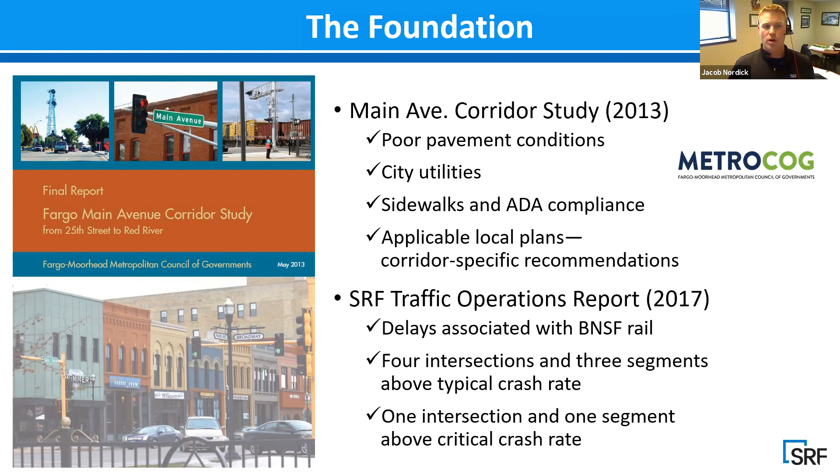The study actually covered from 2nd Street, near the Red River Bridge, all the way to 25th Street. The project we just completed was only a segment of what that corridor study covered, and there's a movement toward completing that next segment. So the segment we're talking about today is from 2nd Street to University Drive.

This was a full reconstruction of the entire corridor, including underground utilities. It was basically building face to building face reconstruction.

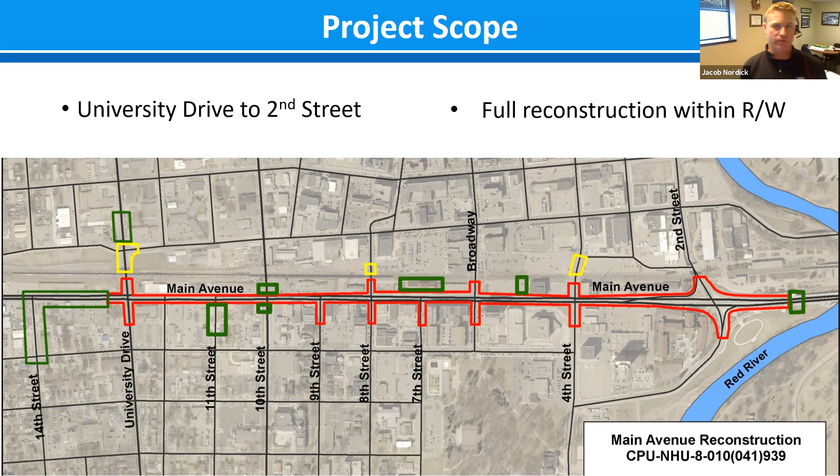Some of the items identified in the corridor study were the poor pavement conditions. As you can see in the photos, the city's had to overlay and repair a lot of this roadway throughout the years with freeze-thaw cycles and a lot of potholing.

As I mentioned, the city utilities, water and sanitary, were well beyond their life expectancy and were in need of repair. The sidewalks, as you can see in the photo, really do not meet ADA compliance from a surface standpoint or a width standpoint.

You can't see it very well here in the photo, but right here is a light pole right in the middle of the sidewalk, and that was pretty consistent along the entire corridor — light poles or signal poles right in the walking path, violating ADA standards today.

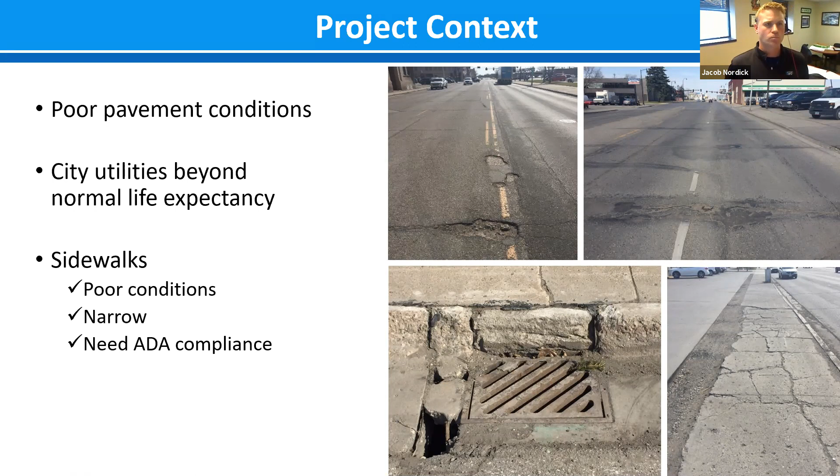So what to do with the current on-street parking, ADA compliance, and the improvements to maintain acceptable traffic operations. It's currently a 5-lane section. There are some turn lane improvements that needed to be looked at further, such as at Broadway and 8th Street.

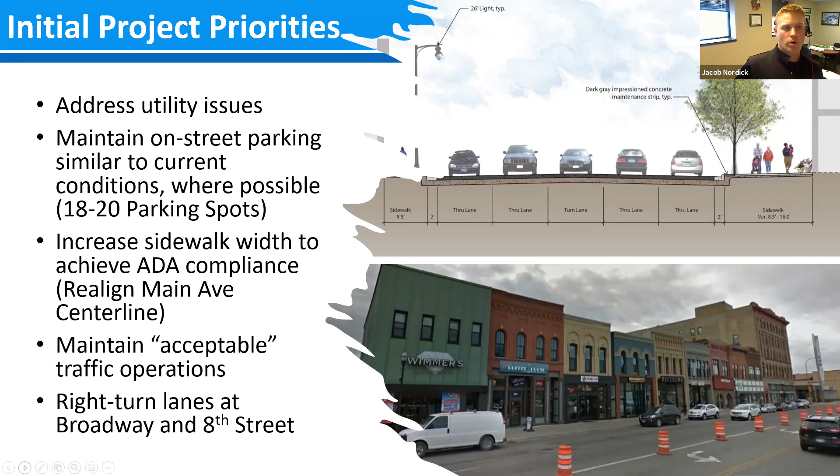One other wrinkle you throw into the traffic operations is the railroad along the corridor, on the north side of the corridor, as you can see here.

We started the project in 2016 with a schedule of completing the environmental and prelim design by the end of 2016, then preparing final design and bid packet toward the end of 2017, for construction to be completed in one season in 2018. Anticipated costs were around $10 million for the reconstruction from 2nd Street all the way to University.

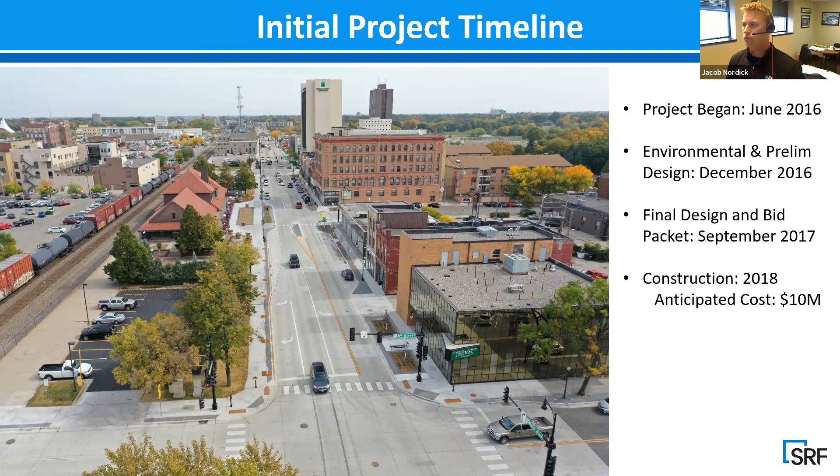As we got into the environmental process, a lot of things changed throughout the development, not only of the traffic, but just the environmental issues.

At the same time, the city had started to develop a Downtown in Focus plan, really focusing on what does downtown need to look like, and what are the city's needs and ideas for the future — grow as a neighborhood, prosper as a business, have Main Avenue or downtown Fargo be a destination center, and how you can have complete streets as part of your redevelopment of downtown. Those are some things the city was focusing on.

At the state level, the governor's Main Street Initiative was kicked off in 2017, with 3 goals for main streets across North Dakota, in small towns and large communities: building healthy and vibrant communities, a 21st century workforce providing working opportunities downtown, and smart, efficient infrastructure, focusing more on that complete streets concept.

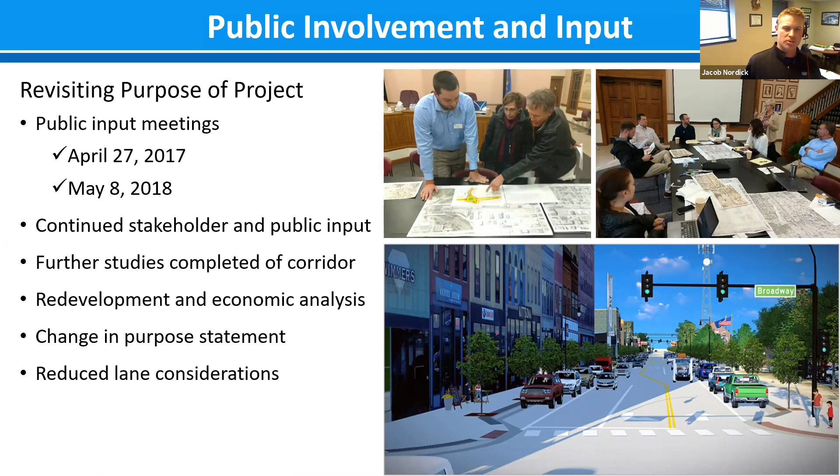There was extensive community outreach. As I mentioned, the redevelopment and economic analysis came about — I'll talk about that in a little bit — and just the change in the purpose of this project. Through that, we looked at reduced lane considerations and how that impacts the corridor, not only from a traffic standpoint, but from a pedestrian environment, growth, parking, and business development.

So we started to really engage the property and business owners along the corridor. Here's a map of all the business and property owners along the corridor, shown in purple. We sat down individually or as groups and talked about it, over 60 representatives throughout that process.

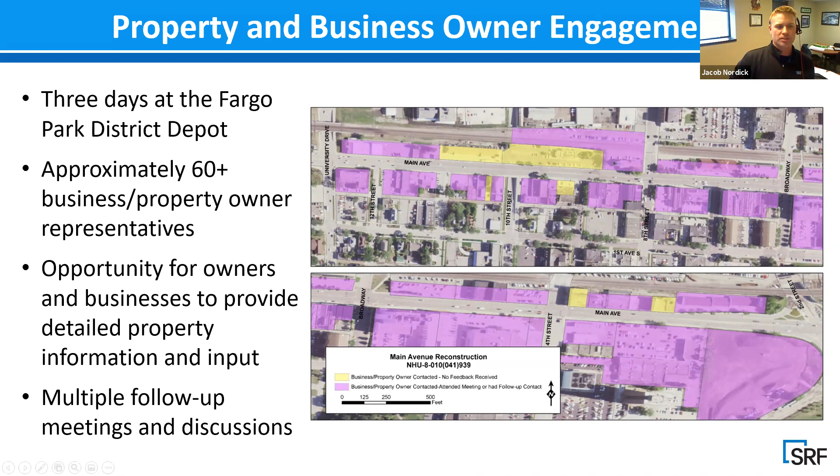And we really gathered information on what's important to each individual business, each individual property owner, and what are their plans for the future as well. So there were multiple follow-up discussions, and we also had further discussions as part of the redevelopment and economic analysis, talking with these landowners. What this analysis did was really focus on what are the opportunities for development if, say, we'd go with a 5-lane section, which is the current cross section of the roadway.

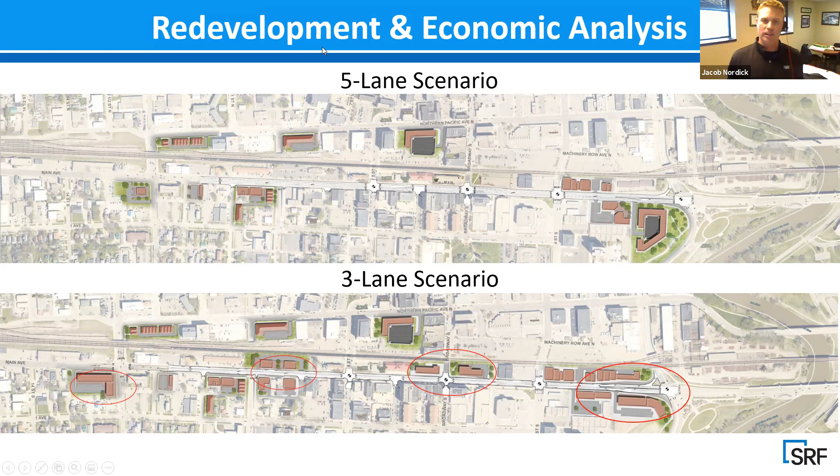What areas are there potential for development? They also looked at, if we do a reduced lane scenario such as 3 lanes, what opportunities are out there. As you can see, I circled the different areas along the main avenue corridor that provide more opportunity than the 5-lane scenario identified as part of this economic analysis.

So the original purpose of the corridor—what was the purpose of this project when we started? It was really to mitigate system deficiencies, address safety issues, improve capacity constraints, and just provide a safe and efficient regional corridor. As this process began, and we began to think outside the box for this corridor, what do we really want to achieve here for the future?

We had made some changes to that purpose. Instead of it just being improving some safety by trying to widen the sidewalks as much as possible, that could be done in a number of different ways, such as adjusting the alignment to balance the width on each side to provide a more consistent sidewalk width for pedestrians.

We looked at how we can make it more active, comfortable, and inviting for pedestrians. That was done through a number of things, through ideas for landscape architecture, that complete streets concept, and curb bump-outs at the intersections to reduce that crossing distance for pedestrians.

And then really incorporating that redevelopment and economic analysis—how is that going to contribute to an environment that encourages business activity, investment, and redevelopment? And then lastly, on the traffic side, we wanted to support regional and local traffic needs.

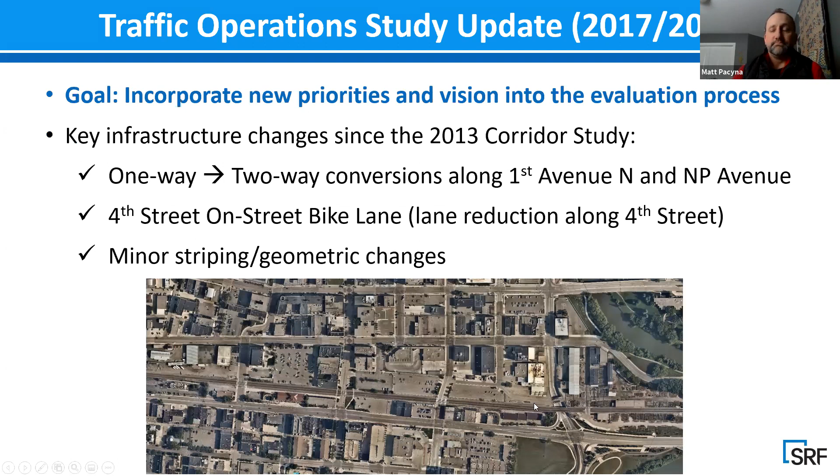economic friendly type of vision. Some compounding factors here to think about. There's the rail line that's just a couple hundred feet just north of the corridor. At the time, there was probably 65 to 80 trains a day running through there.

And if you remember, that was kind of at the height of the oil boom out in Western North Dakota. So there was a lot of train and freight activity running through the corridor, which, given the at-grade crossings at a couple locations, really played into a lot of what the corridor ultimately was built as.

There's a lot of parking maneuvers on the corridor, so we actually took some detailed observations to understand how those users were parking, how long they took, and what the turnover rates were, to really understand that operation, and built all that information into our modeling components.

I think it's something we do more on a daily basis now. Back in 2013, we looked at it more on the ADT level and then at the peak hour level. Nowadays, when you're looking at complete streets, it's more of how does it operate throughout the day. We're willing to maybe live with a little bit more congestion during the peak periods to have a more favorable environment for peds and bikes and other users on the corridor. So that's kind of where things were at and how things changed since that 2013 study was completed.

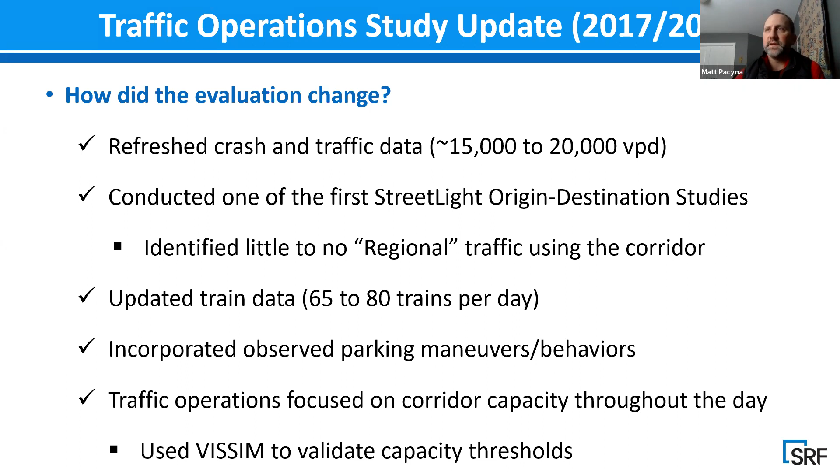So from an alternatives perspective, if you want to go to the next slide, Jake. We basically started with 3 primary alternatives: a 5-lane section, which was more or less what was there today, a 4-lane section, which is essentially a 2+1, so 2 lanes in the eastbound direction, 1 lane in the westbound, with a continuous center 2-way left turn lane, and then a 3-lane option. So those were kind of our 3 primary ones.

As we went through the alternatives analysis, we started to get towards that hybrid, and we'll talk a little bit about why we got there. But in general, that hybrid started out as a 5-lane section coming from the west at University Avenue, transitioned to that 4-lane section from 9th to 11th, maintaining 2 lanes eastbound and only a single lane westbound. Then ultimately with only a 3-lane section towards the east side, from essentially 2nd Street to 9th Street. So that's kind of how the alternatives shook out.

Give you a couple examples on just some graphics that we had developed at the time. I know, granted, these are 4+ years old at this point, so I'm kind of trying to jog my memory as we go through this as well.

This is just some of the tools that we had to use at the time, showing how the corridor volumes change by time of day, given capacity level thresholds for what each of those roadway configurations can handle from a planning level perspective. We started to see how the operations would change at different times of the day, looking at number of hours near capacity or over capacity, and then letting that compare the different alternatives as we looked at each of the different options.

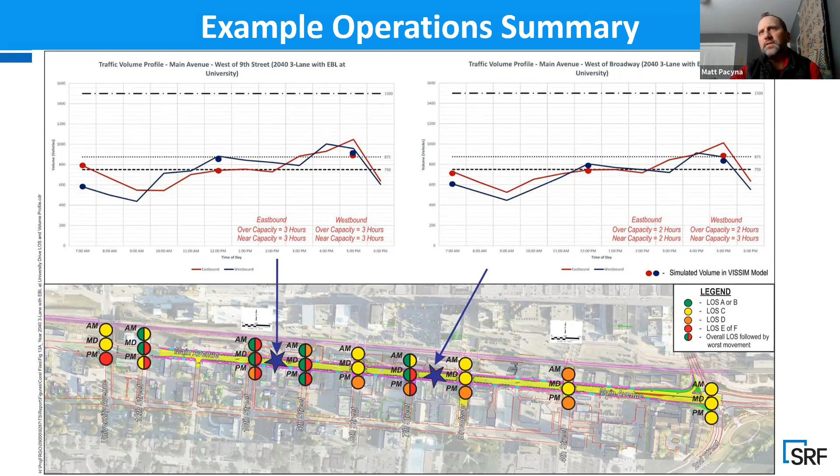We also developed some side-by-side simulations. We don't need to go into too much detail, or if you want to click play, Jake, you can do either or.

But these were essentially used as a tool to help illustrate those operations and how they compare between each of the alternatives.

Now, we looked at things with and without train events. I think Mr. Gordon is on here - we're joking about seeing if we can get him to talk. I don't think he's going to.

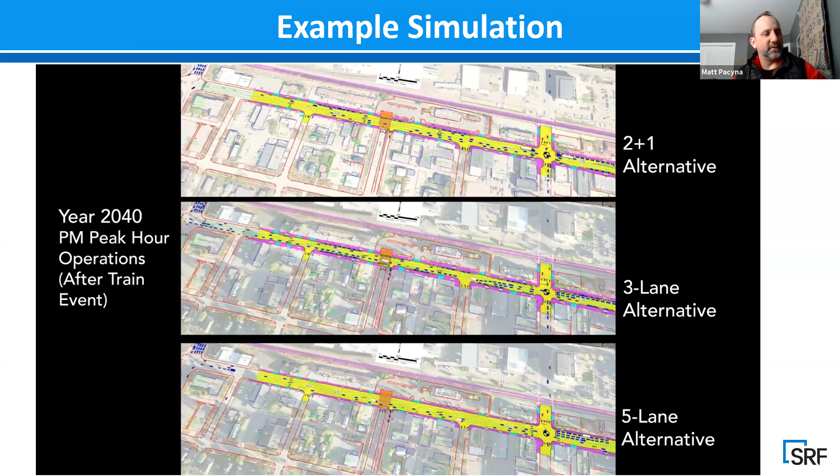But the train operations really were and are still to this day a key component to how Main Avenue operates. And when there is a train event, it can lock things up. So we wanted to be very mindful of making sure we can have enough storage for the vehicles to wait for that.

But then also how we're trying to understand how quickly it'll recover. When you have those peak periods, are you going to start to create diversion? Can things recover in a few minutes, a few cycles, or is it just going to blow up and extend into multiple hours? So understanding that train dynamic was key, and it also spurred on some other improvements that came out of this as well.

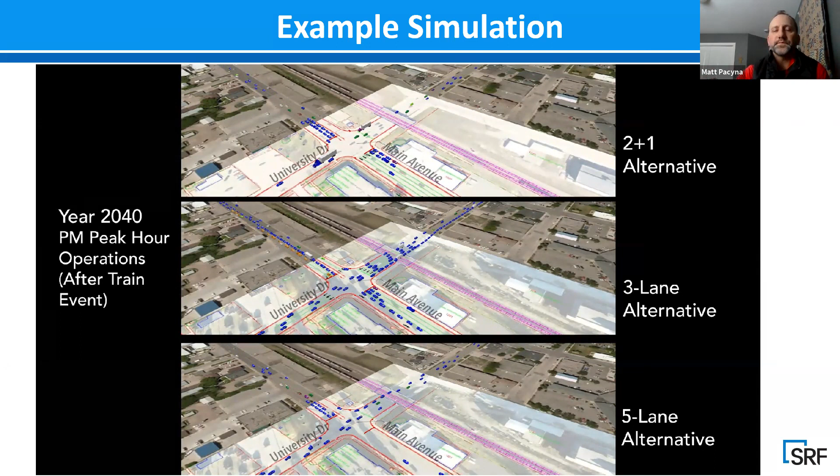So from a conclusion perspective, where do we end up? Really the 5-lane and the 2+1, or the 4-lane alternative, whatever you want to call it, would provide sufficient long-term capacity. The 3-lane option really didn't, and it resulted in some diversion to adjacent corridors. So really that's where the hybrid alternative came out of.

Does it fully meet every single hour of the day? No, it's kind of that balance of all the different needs. We would expect it still would result in some diversion to adjacent corridors. I don't think I've looked at the volume since it's been open and constructed now, but I wouldn't be surprised if there was a little bit of diversion to some of those other corridors.

And then the study also identified some other operational considerations with respect to travel time reliability. I think probably the two main ones that came out of that really was the University Avenue counterflow lane. There's really only one underpass today, outside, for northbound traffic to cross the railroad tracks. There's a couple at-grade crossings, but when you have the volume of train events that they have, finding another more reliable opportunity to get into downtown is important.

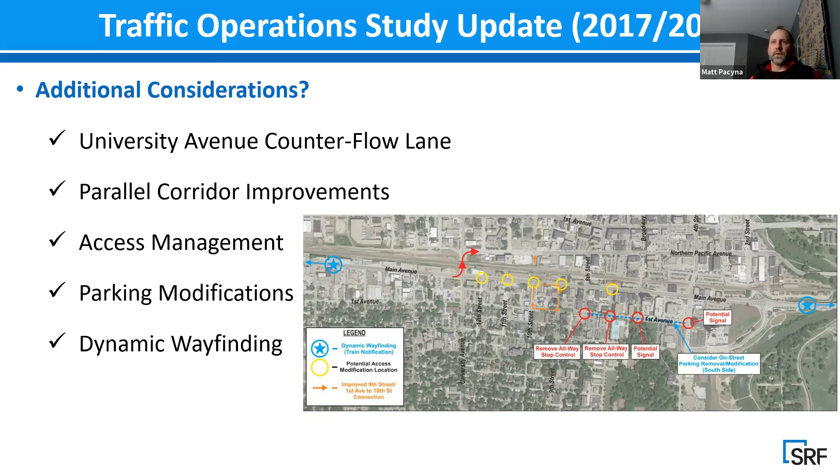Since there's little to no regional traffic from FHWA and the DOT's perspective, do you have any thoughts there?

There was discussion as part of that development during the environmental phase and preliminary phase of rerouting Highway 10 traffic to the interstate. That discussion happened, but then you're getting into multi-jurisdiction between North Dakota DOT and MnDOT as well. With the limited number of vehicles utilizing that for regional purposes, that might have played a factor into just keeping it the way it is. They probably already kind of do that movement already to the interstate. But it was explored, and it was deemed not to reroute the US highway. I hope that answers the question.

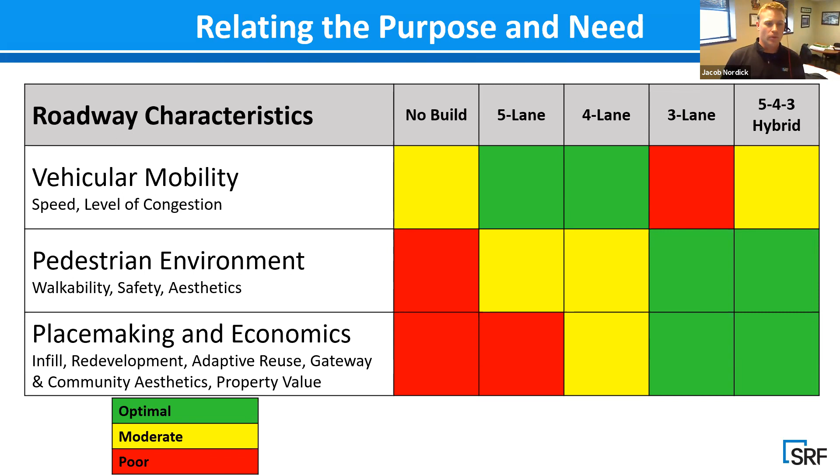So that's where the development of the 5-4-3 hybrid came into play, because as you go through the corridor in segments, there are a lot of different needs depending on where you're at along the corridor. So the ultimate decision was to choose the 5-4-3 lane hybrid design.

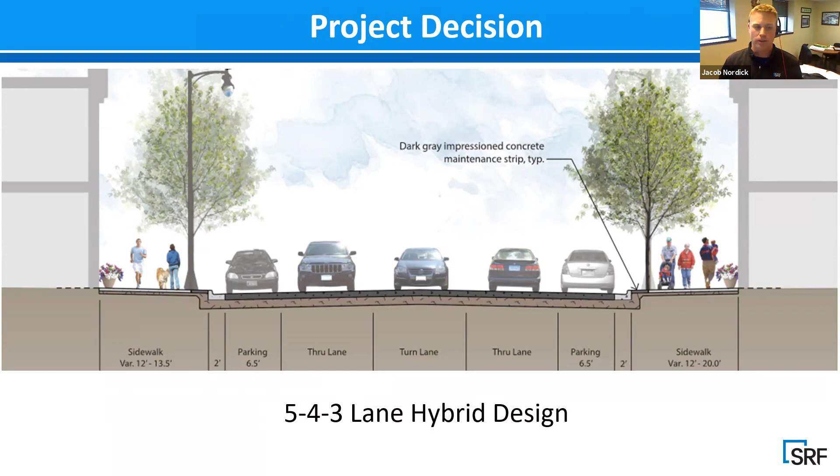So I'll go through the layout that lays out all the improvements, all of the lane configurations, where those changes between the 5-lane, the 4-lane, and the 3-lane occur.

Starting at the east end by the Red River at 2nd Street, this intersection, when the project started, was a signalized intersection. It was really wide, a high crash rate intersection, because you're coming down the hill off the bridge into Fargo, and it was a very large footprint for a traditional intersection, including the current skews at this intersection with 2nd Street.

So the city of Fargo made the suggestion, let's look at a roundabout. We have the room to put a roundabout at this location, and we were able to achieve placing a fairly sized multi-lane roundabout in this area with little impact to current right-of-way.

And as you can see, the legs of the roundabout have different lane assignments, number of lanes, depending on where you're going. We really analyzed that from a traffic standpoint of how to make this roundabout operational and fit the needs with the different configurations of the number of lanes, whether it's a drop lane or any of that.

So as we head west coming out of the roundabout—I should backtrack a little bit—coming out of Minnesota, it is a 4-lane, 2 lanes in each direction. So that's another way at this intersection with the roundabout design, to drop lanes or add lanes depending on which direction you're going.

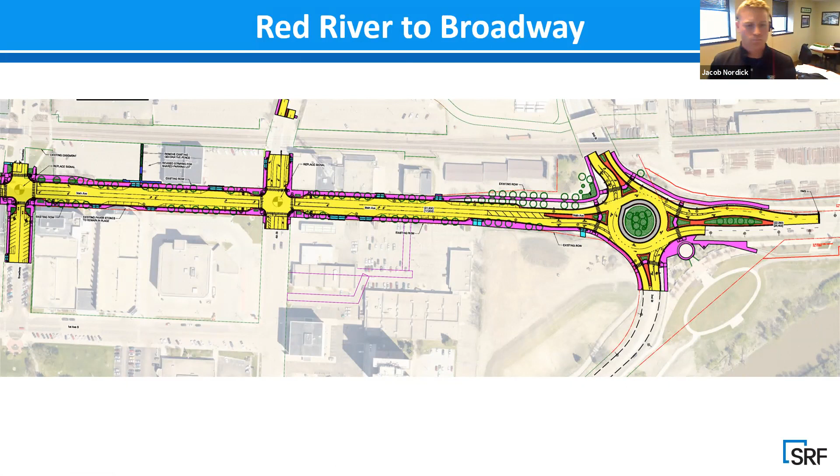The next part as you head west is 9th Street, where you see that break where the 3-lane section transitions, and 9th Street becomes a 4-lane section with two lanes in the eastbound direction. We chose this spot to drop that second lane heading east at 9th Street because, recalling the different grade-separated crossings available around the corridor, this allows eastbound traffic wanting to head north to downtown Fargo to utilize this 9th Street loop to the northbound one-way 10th Street underpass to get to the north.

Then as you get to about 12th Street, there's development of the 5 lanes, going from the 2+1 configuration to 5 lanes to tie into existing conditions near University Drive.

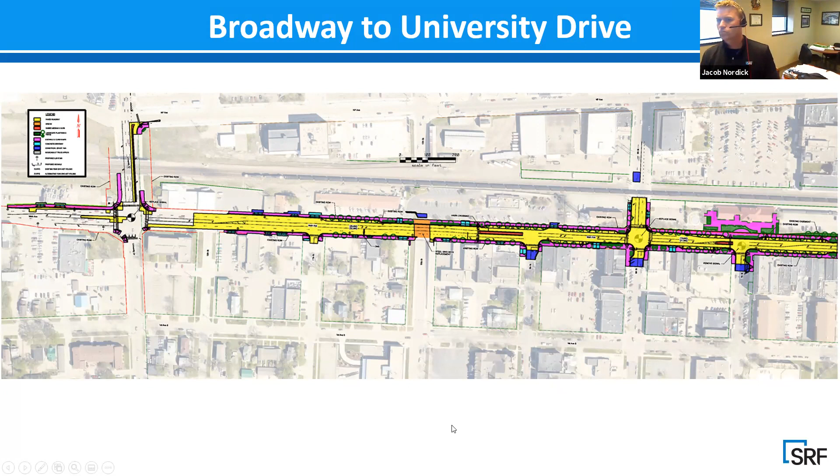As part of that extensive and involved stakeholder and public engagement process, we really utilized 3D visualizations to get a sense of what each of these alternatives look like, and get a sense of what it feels like and whether it fits the corridor needs.

I'm going to run a simulation here of the 543 hybrid, and then following that, I'll run a drone video of the completed construction, so you can see how that vision early in the process came about and what it looks like in the end.

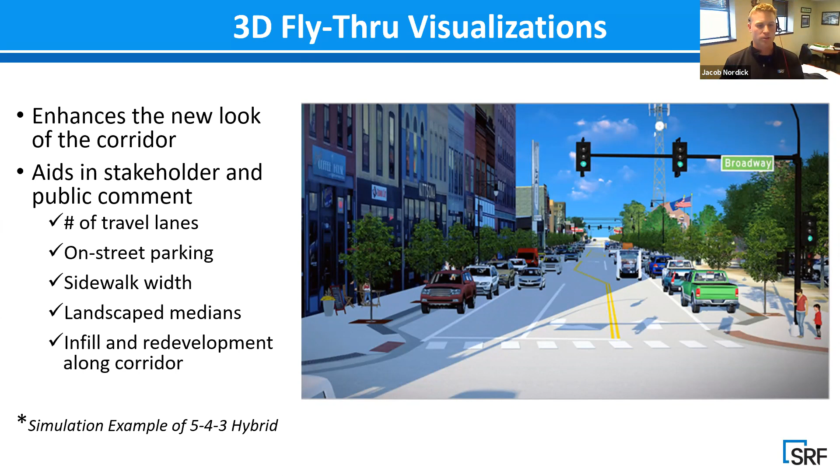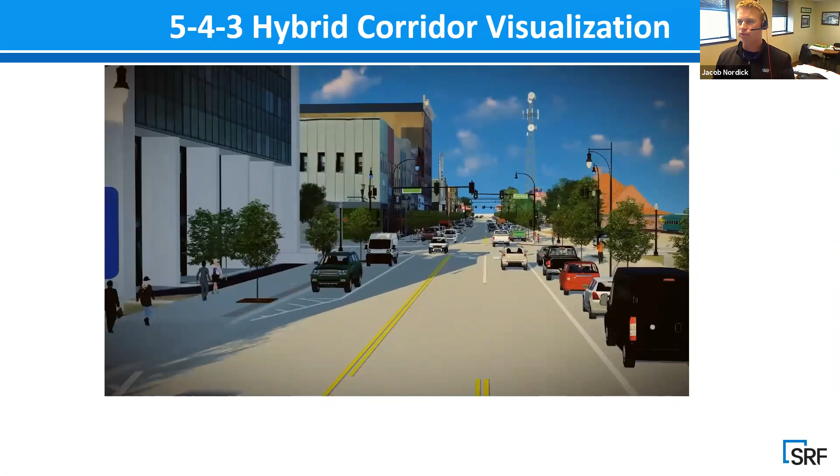For the 543 hybrid, it's not going to show the roundabout because that was a separate visualization. It will show the 2nd Street intersection just as it was previously. I apologize if it's choppy with the internet connection, and I think it's going a little faster than it normally would when we were presenting it. But you get an idea of the western or eastern segment of the corridor—it's really a downtown multi-use facility generating pedestrian traffic, businesses, and apartments up on top.

Right there is the Park Depot. It's an old train depot that serves as the Park District's offices, and I'll talk a little bit about that as we go.

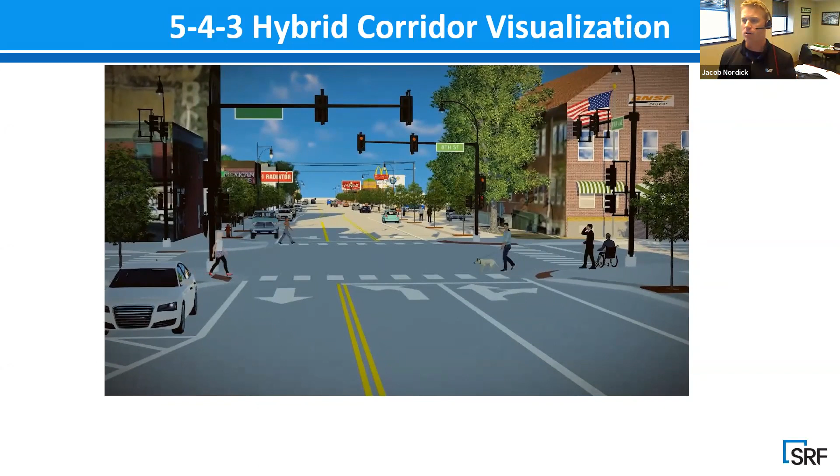It's going to show a simulation of that pedestrian crossing, the shorter crossing. If you imagine out there today, you have additional lanes that pedestrians have to cross, but with these curb bump-outs, you shorten that crossing and make it safer.

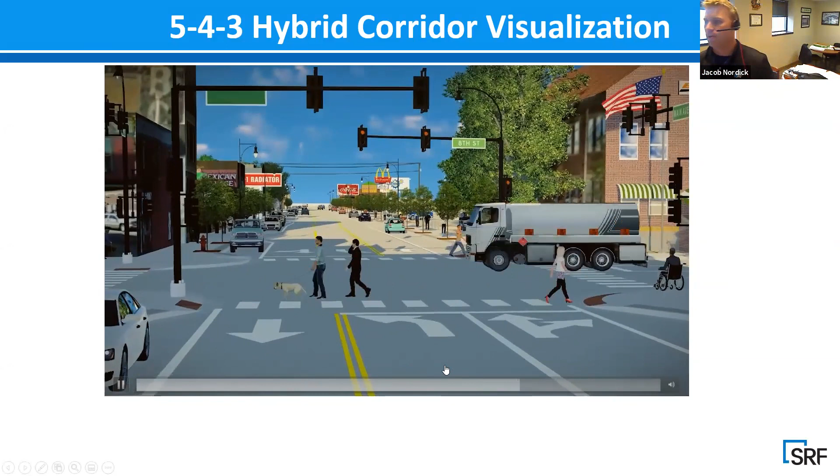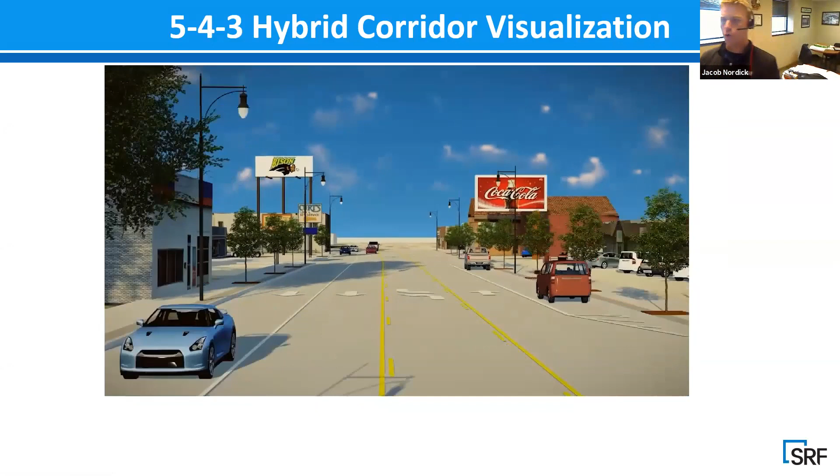Now we're getting closer to where that 4-lane section ends. You can see the look of the corridor is more open, with less multi-use facilities. That's where it's going to stop. You can see just from that visualization the changes along the corridor, going from that downtown business district to more open commercial-type businesses.

I'm going to run this drone footage that we took after the project was done. This is from Broadway to about 8th Street. So I'll run that as well.

One thing too, at this 7th Street, I'll pause it here as we get there. Now there's a train running north of the project for this video. Oh, I lost it—let me get back to it here.

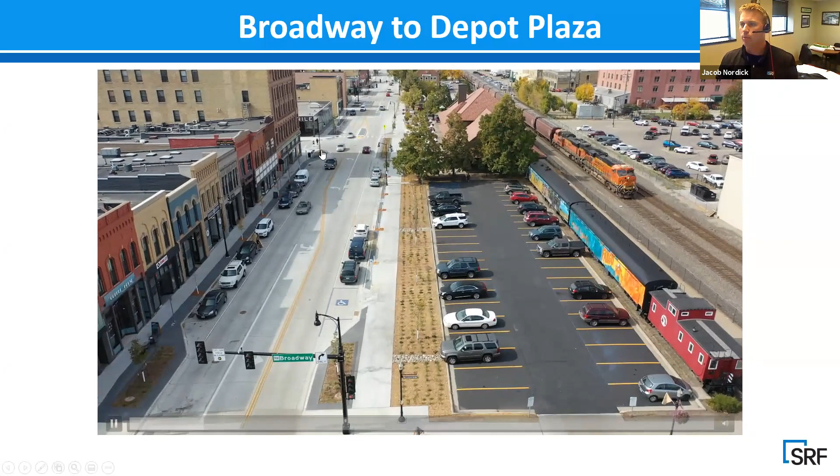So this is 7th Street. This was a signalized intersection as well, but as part of the improvements, one of the options was to remove that traffic signal, and that did get implemented. But we did also allow a crossing because of the amount of foot traffic that goes to the Park District at the train depot there.

As you can see, this area right here in front of the depot used to be a turnaround, a pull-off from Main, a pull-up area where you could drop off, park your vehicle, get in the building, and then get out. From a capacity and traffic operations standpoint, we decided to remove that and provide a more streetscape design, more inviting for pedestrians, and help out the look in front of the depot.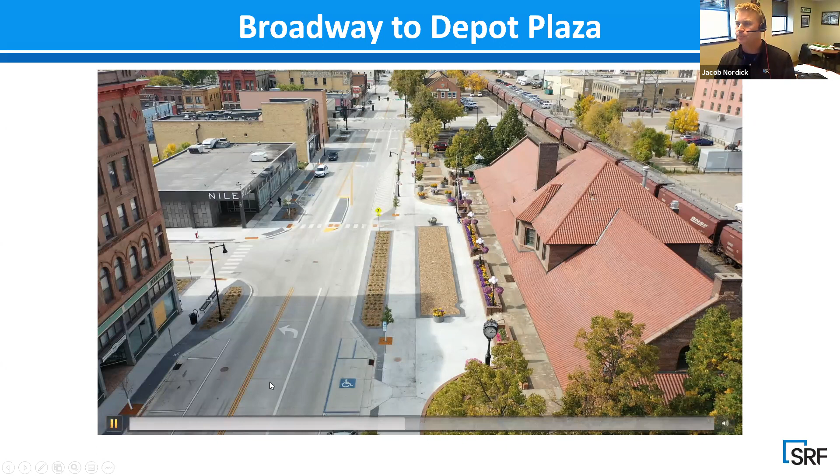With this being early, there are a lot of plantings in these planting beds that haven't fully developed when this drone footage was taken. There were other options to also reconstruct the entire front of the Park Depot as an addition to the project, but funding after bids didn't allow that to be incorporated entirely. They do have the plans and can do it in the future if funding becomes available.

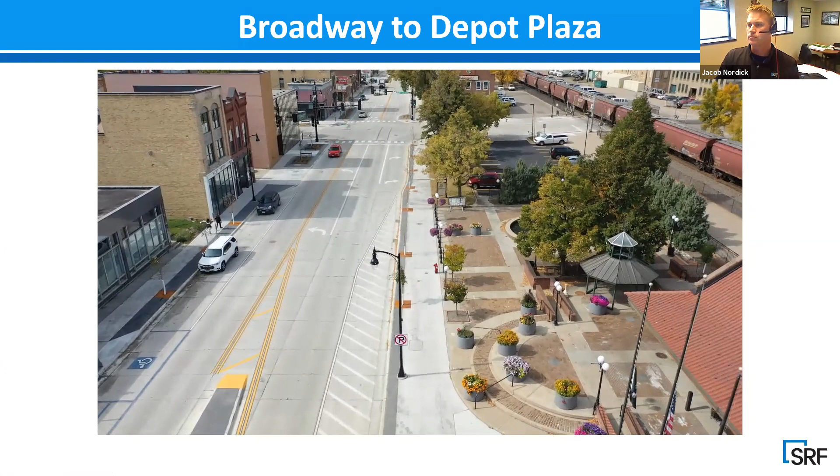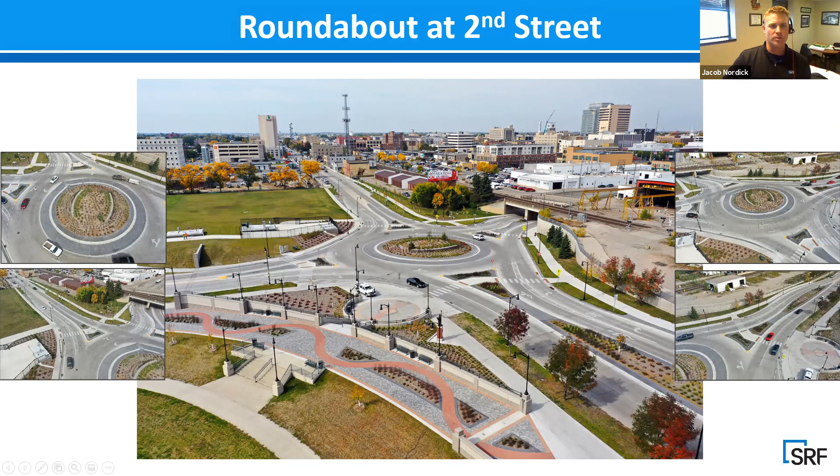So here's a few elements of the roundabout. You've got your center island, pictures of the different legs, and also the 2nd Street underpass. I do have a simulation for the operation of that roundabout to show as well.

I'll let that run. This is taken from our drone as well. As you can see, there was a lot of delay previously when this used to be a signalized intersection, having to do those left turns to 2nd with oncoming traffic. This just provides safer intersection control, not only for traffic but also pedestrians. Pedestrians only have to look one way when crossing, so that provides additional benefits as well.

Along with the splitter islands, it provides a refuge as well for those pedestrians. You can't really see it very much in this video, but this grade drops down pretty quickly, around a 6% drop trying to get to that underpass. That provided some design challenges as well when designing the roundabout.

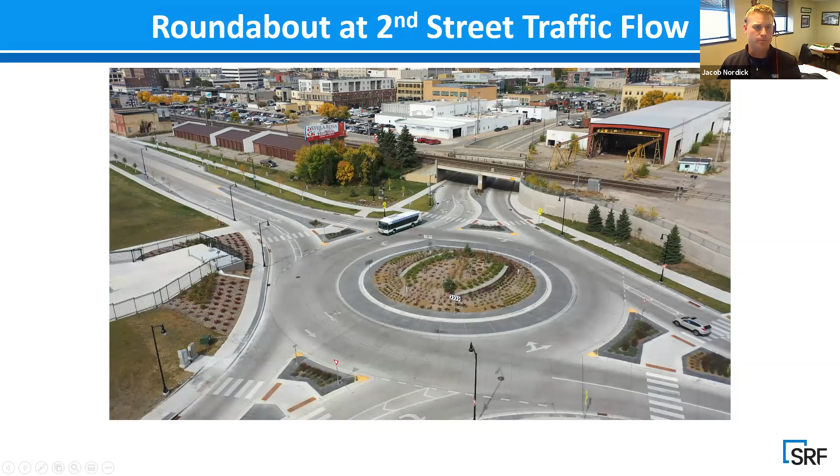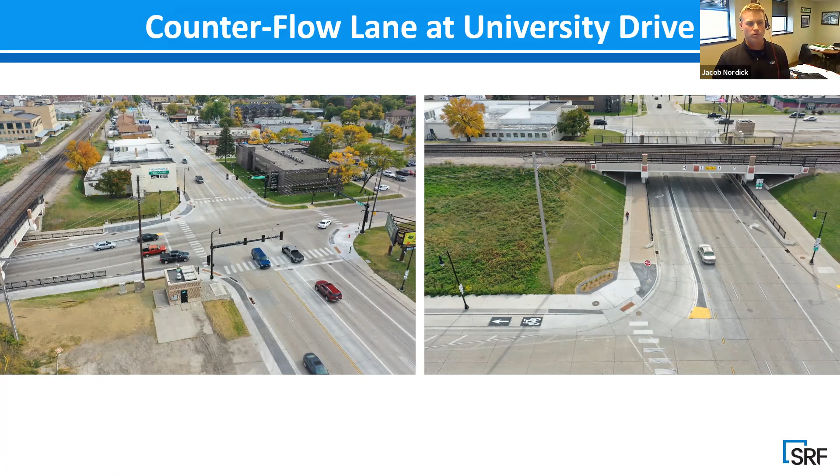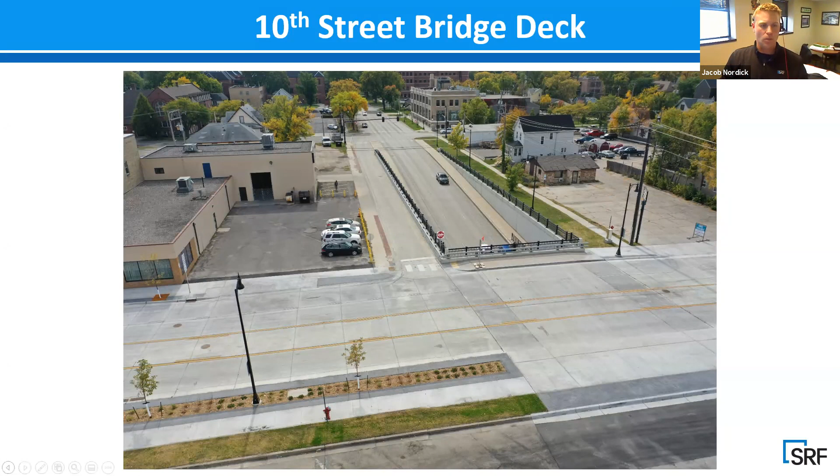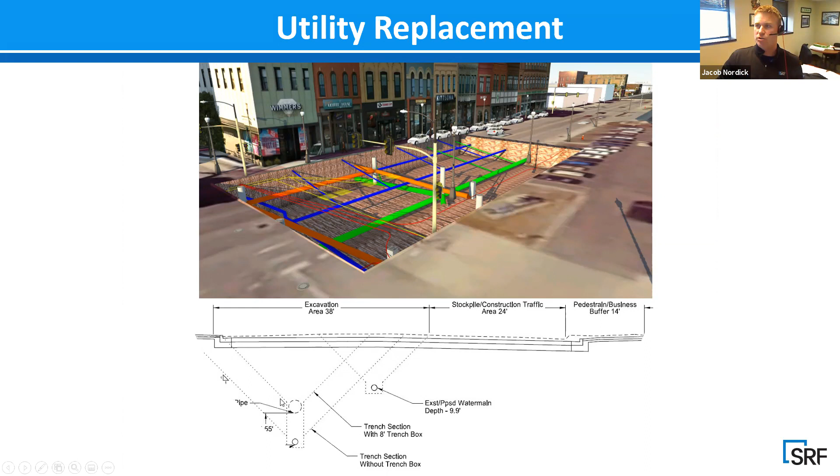Utility replacement was a big piece of the project. As you can see from this 3D utility layout, it's a pretty involved design with storm, sanitary, water main, and all private utilities to go along with that. This really spurred the construction phasing of how we built this project. Initially we were trying to build it under traffic, but ultimately the decision was to close segments of Main to construct this. As you can see, you're getting pretty deep into the roadway, with some pretty big excavations that go along with that. Apex Engineering was in charge of doing that design.

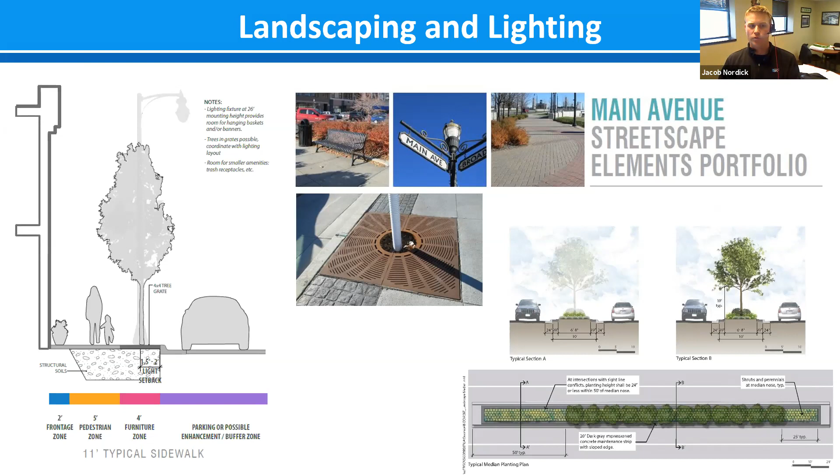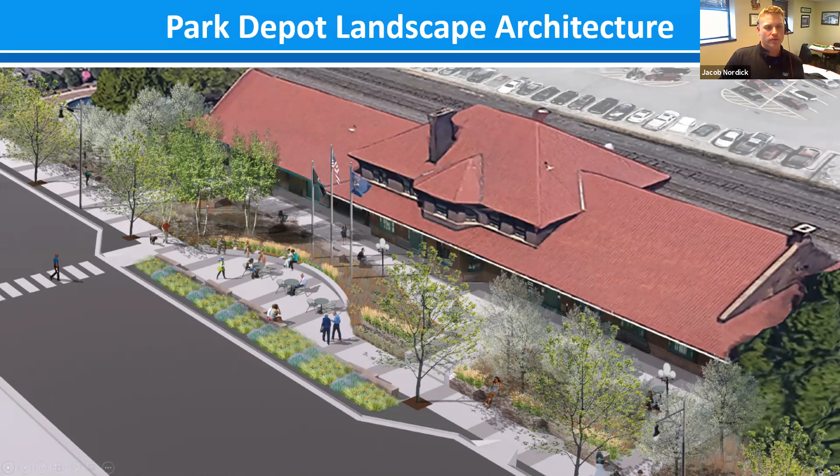Landscape and lighting was a big piece of the streetscaping, the complete streets portion. A lot of tree plantings along the corridor, planting beds, benches, trash receptacles, a lot of different improvements. And part of that as well was the redevelopment and reconstruction of this Park Depot site. It was a separate entity to the project. The design was completed, but the project didn't move forward yet due to lack of funding for it. Hopefully in the future these improvements along the front of the building do come about.

Now, ITS and innovative designs that were part of this corridor. So a new fiber optic communication system along the entire corridor.

We installed a train warning system that really ties into those digital message signs, the DMS, and the signal preemption. So we have 3 sites of DMS on the very west end of the project, just west of University Drive, the project limit of where the reconstruction was.

Here between the 10th Street underpass and 11th Street, and where that 4-lane section ends, we have another DMS sign to direct traffic to utilize this 10th Street underpass, but also to alert them of the drop of the lane as well. And then at the very east end of the project, just coming out of Minnesota, another DMS for

vehicles to utilize that 2nd Street underpass. And those are all tied into the preemption. So when the signals get word that a train is in the area, that message then also gets sent to the DMS signs. There was a Hawk pedestrian signal that was added, and that is right here.

The nearest crossings for where this Hawk was installed were A Street and University. So there's a big gap in this area, and right here is an Asian market where a lot of grocery and Asian market foot traffic happens. So there's a lot of pedestrian traffic that just crossed Main Avenue at non-identified crossing locations. So this is a benefit to bring some safety aspects to it.

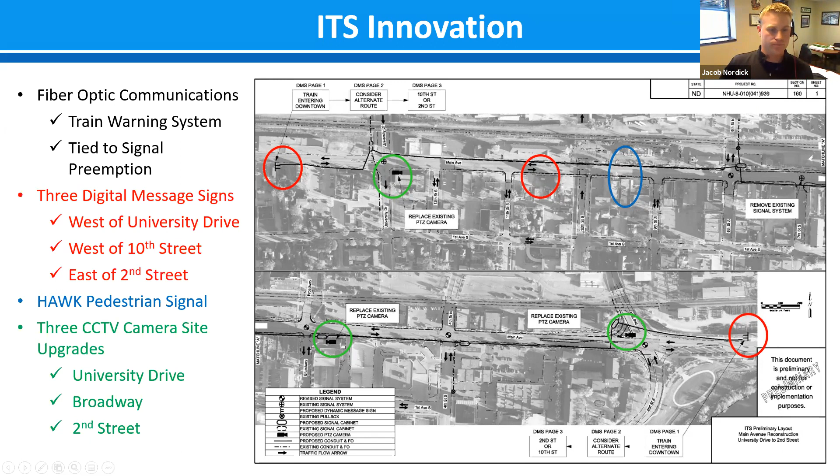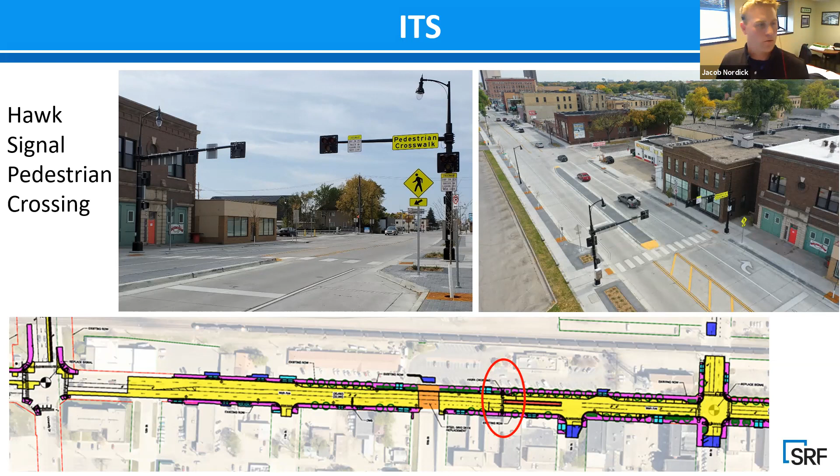Here are a few photos. Here's the Hawk crossing, pedestrian crossing, at kind of that mid block of where A Street and University Drive are. And then here are the DMS signs.

This is the one just before the lane drop from the 2+1. As you can see, here's a right lane ends ahead sign that's up there when there's not a train. When a train does enter the site, that triggers the messages to alert traffic to use different routes.

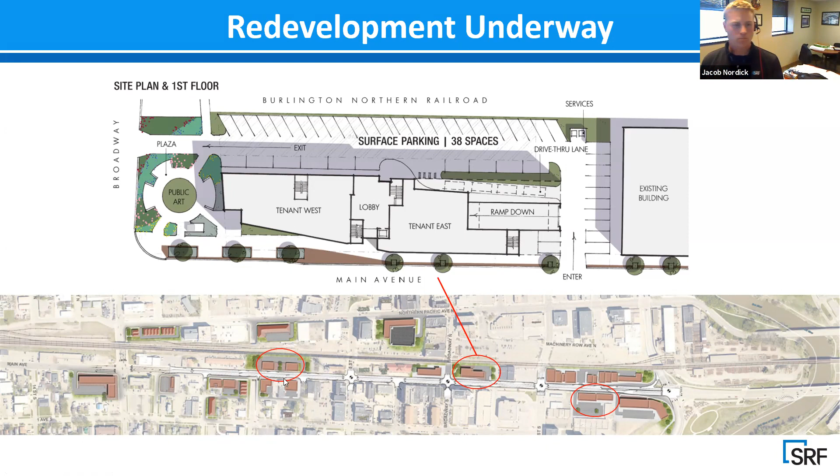The project has really gotten a lot of support from the community, from the mayor, from Jeremy Gordon, the city traffic engineer from the city of Fargo, who's on the call here today. And also at the state level, the governor has recognized it because it really meets that vision at the state level of the Main Street Initiative, and has gotten a lot of great support and good feelings for the future, not only for this corridor, but for other Main Street corridors throughout the state of North Dakota.

And that concludes our presentation. So I hope that we'll have some good conversation and questions that we can discuss.